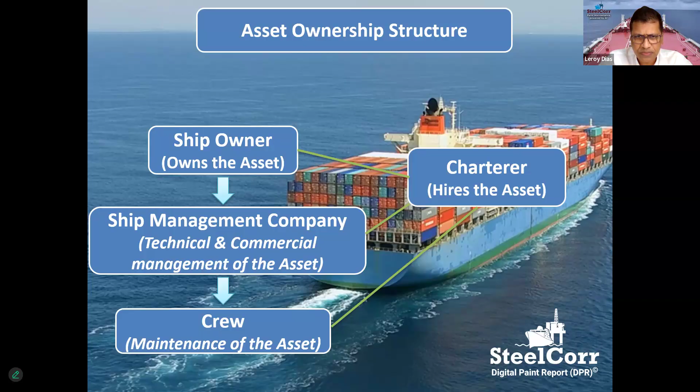The rental rates for the ship per day can range between $5,000 to $100,000 per day. That's what the charterer pays the ship owner in order to hire that ship and move the cargo. The reason I'm highlighting this is because it highlights how relevant it is for that asset to remain available, not have breakdowns, not be detained, and be fit for purpose as much as possible, so the ship owner can make money and get a return on the investment.

Another relevant figure is the cost of replacing steel. It costs between $4,000 and $10,000 to replace a ton of steel on a ship, depending on where that ton of steel is on the asset. In contrast, it costs only up to $500 to maintain that same ton of steel with paint for over 5 years. So it's a no-brainer that it makes sense to maintain steel with paint and proper corrosion management techniques to ensure it doesn't get to the point where it needs replacing.

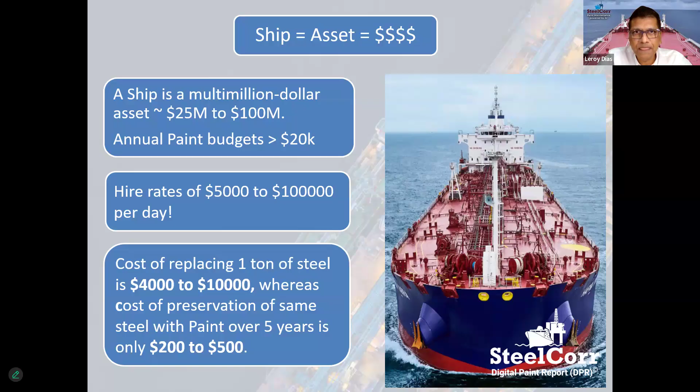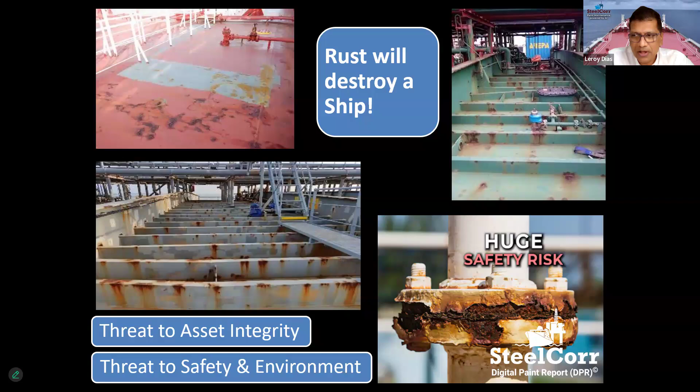This slide is self-explanatory; I don't need to explain that rust will indeed destroy a ship. It's a threat not just to asset integrity, but to safety and the environment. Why? Because if a valve or flange joint leaks and you got crude oil or chemicals leaking onto the deck of a ship sailing in the water, that crude oil or chemical is going to go straight into the seawater and contaminate it. Apart from the reputation damage this causes, the financial damage or fines are so huge they can set back the company quite a bit. So it pays to make sure your ship doesn't get to a point of deterioration where this kicks in.

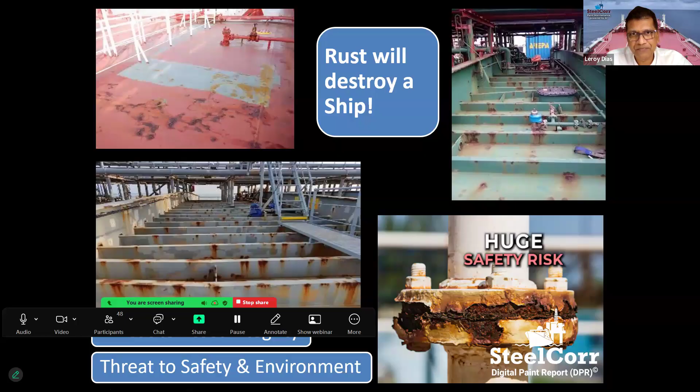The other relevant factors are the several regulatory inspections on a ship, either by the charterer, who will hire a surveyor to vet the ship each time it has to carry cargo, or port state and flag state inspections to make sure your ship conforms to the latest standards it's supposed to abide by.

If you look at the top right where you've got the cargo tank, clearly if a surveyor or charterer comes and inspects that cargo tank, he's not going to accept it for carrying vegetable oil for food grade consumption, or to carry a high purity chemical, because that will contaminate the cargo. So it will get rejected by the charterer, which means you're not making your daily hire rate.

The vessel is off hire until you can fix this. You can imagine the financial damage of between $5 to $100,000 per day.

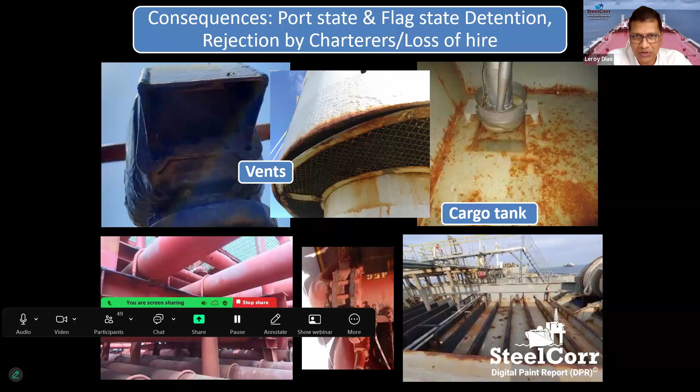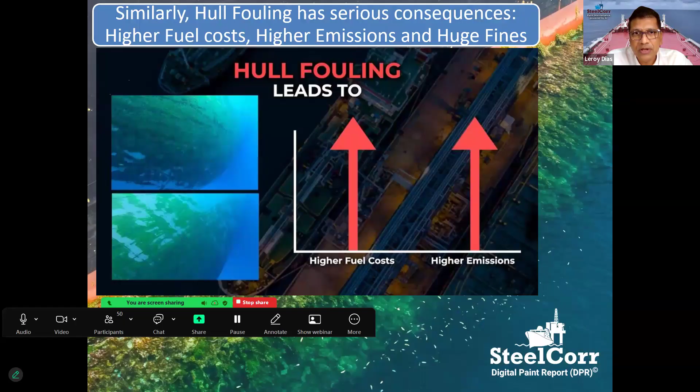Now, we're not going to talk about hull fouling, but I just thought I'll mention it here because it's extremely relevant for a ship. Hull fouling has serious consequences because it leads to higher fuel costs. What you see in the background of this image is a ship that is fouled with grass and shells. It leads to higher fuel cost, higher emissions, and obviously in some cases, a huge fine for transporting invasive species from one country to another in the water.

Now, there are different approaches for corrosion management when it comes to a land-based asset as opposed to a sea-based or an ocean-going asset, because the parameters are different. The metrics of evaluation are different, which we'll go into.

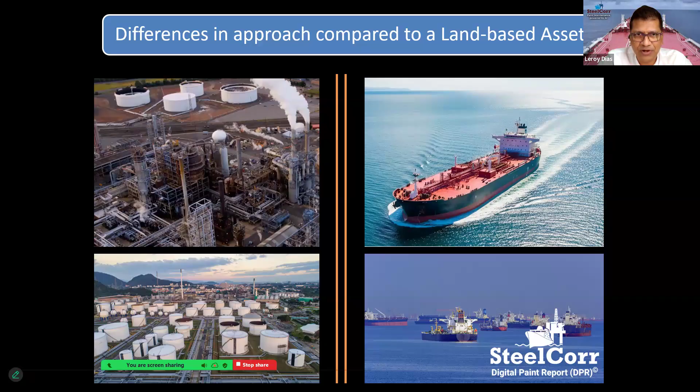What are the challenges on a ship? As you can see, there are several challenges. I've listed some of them, but I'll highlight a couple. One is your ship is not accessible for inspections like a land-based asset. You cannot get an inspector at your will, put him on a ship and let him conduct the inspections because, like I said previously, the ships are at sea most of the time. When they do come to port, they're busy with cargo operations of loading and unloading. The ship is not available for an inspection. So there's limited opportunity or limited windows for ship inspections.

The other aspect is for the crew, there's limited connectivity on board in terms of internet and Wi-Fi. You do not have unlimited access to internet connections.

The third part is the frequent crew changes. The crew on a ship changes every 3 months, which means there's limited ownership for the asset. So once the crew changes and goes to a different ship, they may or may not come back to the same ship again. So there's no ownership of the asset with the seafarer, with the crew. That's why it's important to have a mechanism in place that will, by default, give you a continuous monitoring system, regardless of who the crew is and regardless of how frequent the crew changes on the ship, right?

So we felt a more holistic approach was needed. And it's not just a matter of making inspection reports, but we needed to create a holistic approach and a holistic solution in order to deal with the challenges that are faced on a ship. That's where the SteelCorr Digital Paint Report app kicks in.

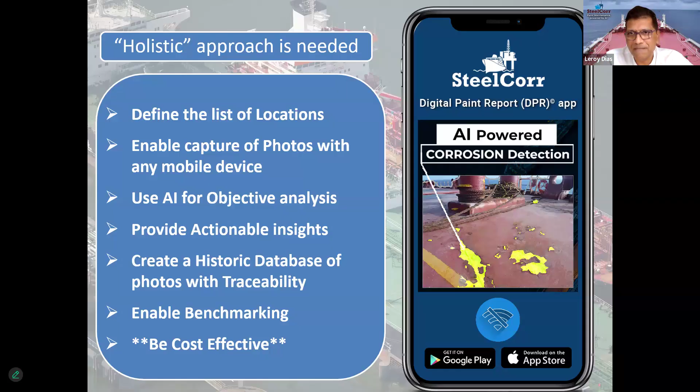In the case of the app, he simply clicks the pictures. It takes him about an hour and a half to click 150 pictures, because they are predefined, point and shoot, click the pictures, hit upload, job done. That's how simplistic it is to use the app.

There's one app for all areas of the ship. Whether it's your deck, your tanks, your superstructure, your underwater, or whether you're making daily reports, you use the same app for all areas of the ship. That's how simple it is.

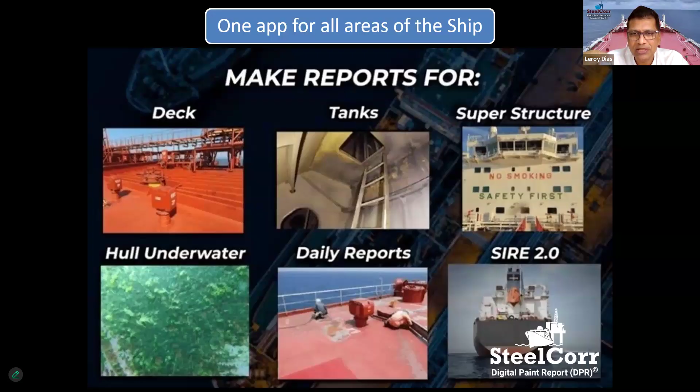Now, what do we do when the photographs come to the server? We use AI to process these hundreds of photographs, because each report can have 300 or 400 photographs. Rather than have a human being go through these individual photographs and make sense of them, we use AI to quickly process them and objectively assess the corrosion level in each photograph. So AI looks at each individual photograph, assesses the level of corrosion and fouling if it's underwater, and gives you a metric of corrosion and repair area in each photograph.

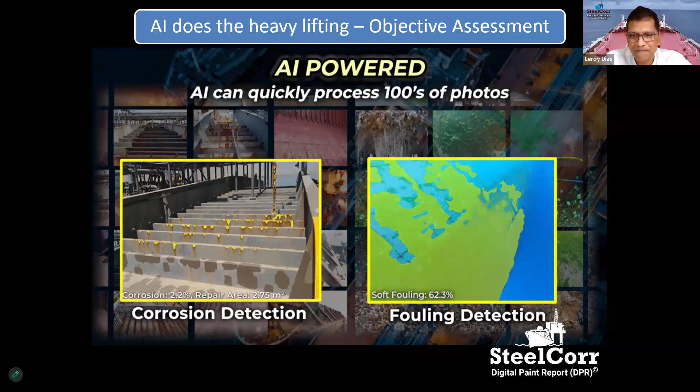Just to show you a few examples, on the left is the photograph that was uploaded by the crew. On the right is what the AI has done to it, highlighting all the yellow spots, which is where the corrosion is on this particular image.

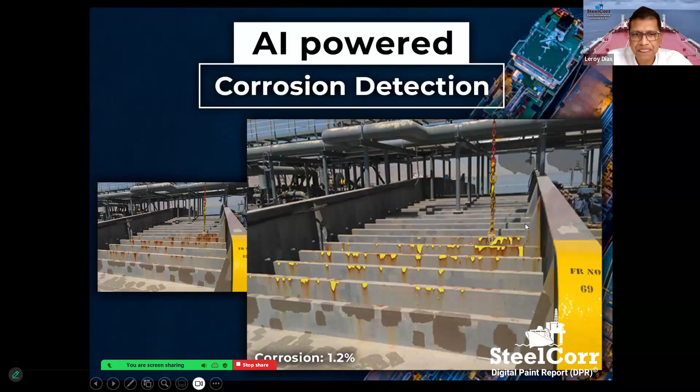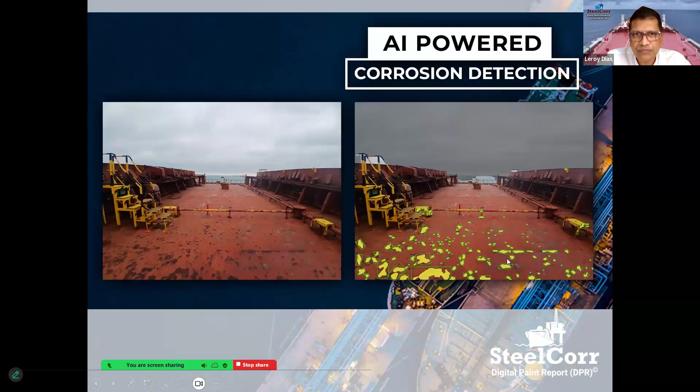Similarly, it's done here, so every photograph that is uploaded by the crew is analyzed. This is a cross deck between two cargo holds on a bulk carrier, same way. This is the cargo tank, a suction bell mouth area of a cargo tank, and as you can see, all corrosion spots are identified and marked up.

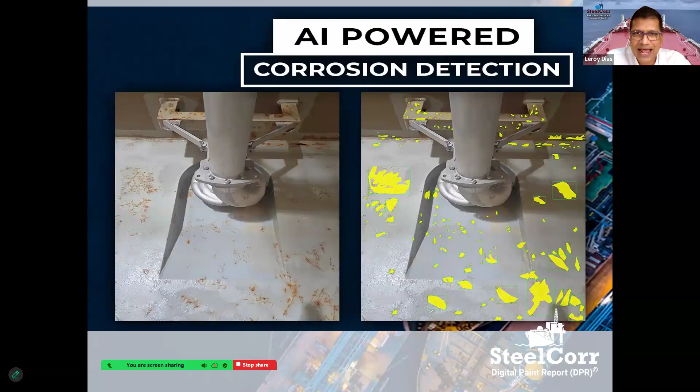So you know what the corrosion level is, and you also know what the repair area is, as calculated by the app. What we then do at the back end is stitch all this information together and give the user a dashboard with all the relevant information.

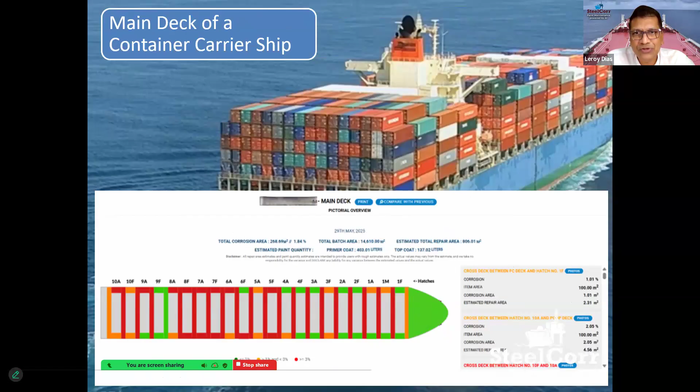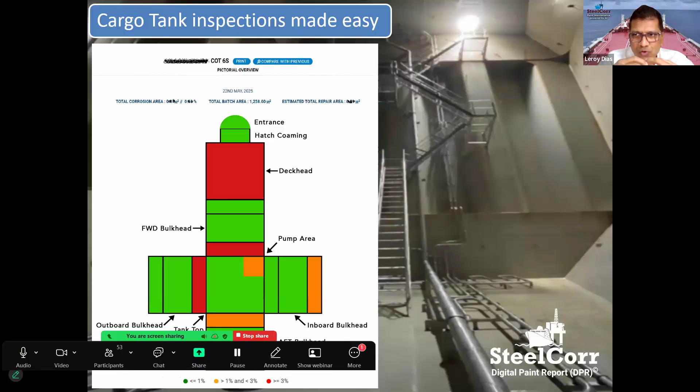Again, because it's a continuous monitoring system, you'll keep seeing that information change as you go along. You do the same thing for cargo tanks, seeing a pictorial overview based on the photographs uploaded for different sections of the cargo tank. Remember, all these locations are predefined on the app, so the crew can simply go and put the photographs of these locations. We do the same thing for ballast tanks, depending on what kind of format you've got for ballast tanks.

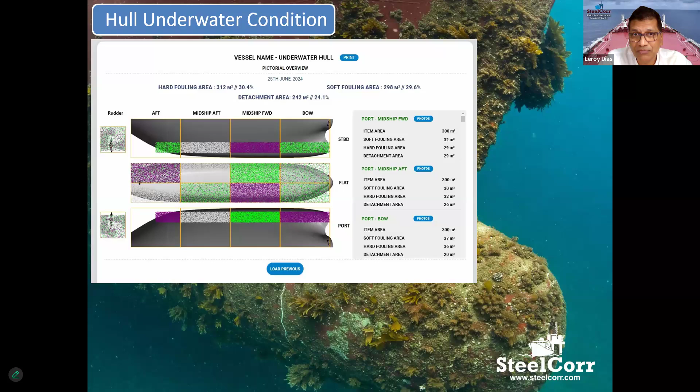Again, the app is customizable. We do the same thing for the underwater area, wherein we detect soft fouling, hard fouling, and detachment. So you also get an understanding of what the underwater area of your ship looks like, which is very relevant in terms of your fuel consumption and emissions.

We made our app compatible with drones, which means if you're sending drones through your tank, or sending a drone underwater to capture images, you can use the same app, simply connect it through a cable, and use it to conduct drone inspections on your ships as well.

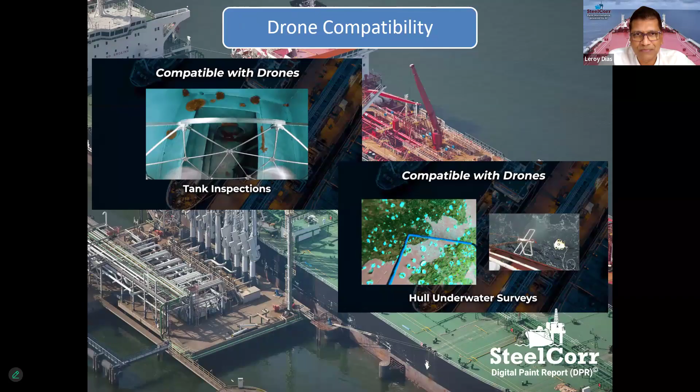All the information generated on the app, apart from being on the dashboard, is sent to stakeholders via email. So you're not looking for this information - it comes to you straight via email in your inbox.

Apart from the corrosion, you can also manage your paint consumption on the ship. So you get a quick overview of what your paint consumption on the ship is versus what the corrosion level on your ship is. That gives you an understanding of how your paint is being put to use on the ship.

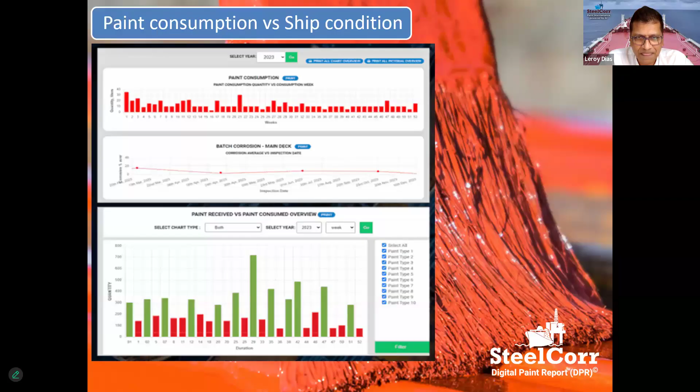We allow you to trace the photograph, so you can go at any point, click on the dates and the location, and see what a particular location looked like previously, how it has changed over time. You can do this at a click of a button.

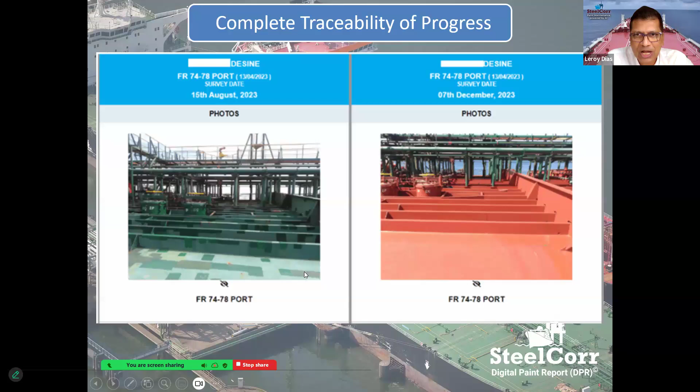You can also benchmark your assets across different ships. So you can go and look at, for example, the forecastle deck on 3 different ships or 10 different ships and see how it looks on different ships, understand whether the maintenance on one ship is different from the other, and use that for benchmarking your fleet as well.

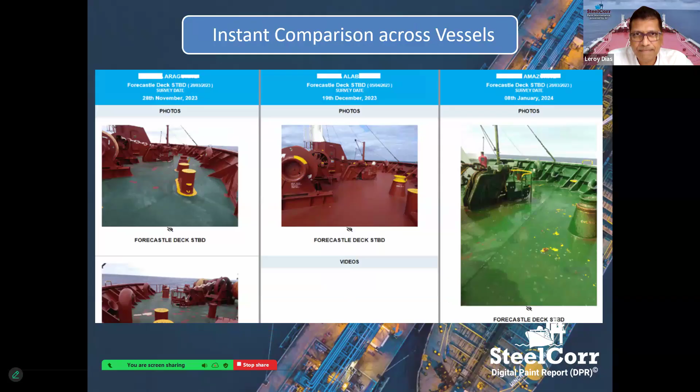The crew, of course, can show off the good work that they're doing by making daily reports.

We are particularly pleased by the feedback that we get from the crew, because that for us is the link that helps us - you've got to remember that the crew we use for capture of the photographs are not paint inspectors, they're not corrosion engineers.

But the way we simplify the process is that we load up the app with all the locations. We make it simple for the crew - it's point and shoot literally. So they point to the location on the app, take a picture, and upload that.

It takes them 1/10 of the time it would normally take to make a report, which is why the feedback from all our crew is that they love it, because it saves them time. It's easier to upload - they don't have the headache of taking photographs, resizing them, downloading them, putting them in Word or Excel formats, and emailing them. Everything is done by the app.

When it comes to your cybersecurity and data privacy, that's taken care of because we securely host your data on the cloud. The access to the data is controlled - only the subscriber decides who gets access to the data and for how long.

We've spoken a lot, and in order to summarize this before I end, I just got a 2-minute video that I would like to play that would bring all this together and summarize the entire app in under 2 minutes. So I'm just going to play that video for you now.

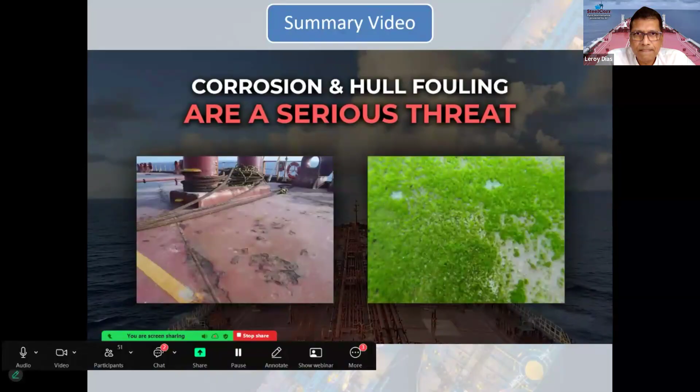Can AI help vessel managers save time, money, and support their ESG goals? Corrosion and hull fouling are a serious threat to your multi-million-dollar assets. Poor fabric maintenance can lead to port state and flag state detentions, rejection by charterers, a bad reputation, and is also a huge safety risk. Hull underwater fouling leads to higher fuel costs, higher emissions, and often draws big fines. So, how can technology help?

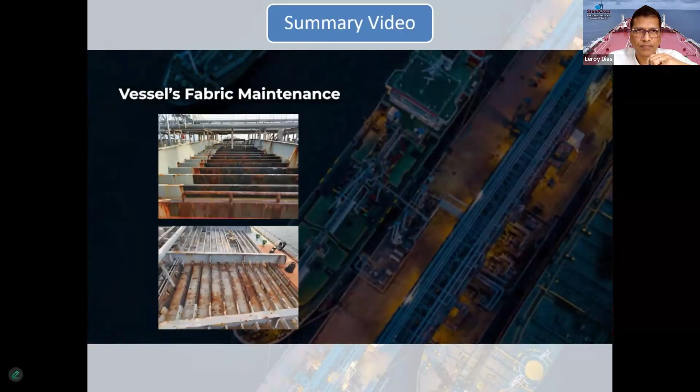The AI-powered SteelCorr Digital Paint Report app is a comprehensive solution that supports a vessel's fabric maintenance and hull fouling monitoring program. Your team simply uploads photos, our app does the rest. All deck, tanks, superstructure, hull underwater, daily reports, and SIRE 2.0 photo reports can now be done using a basic mobile phone.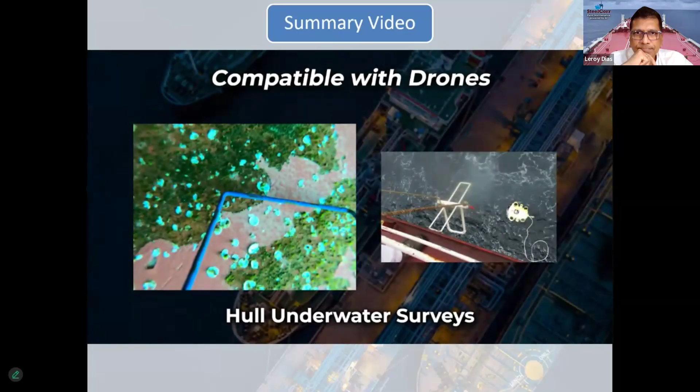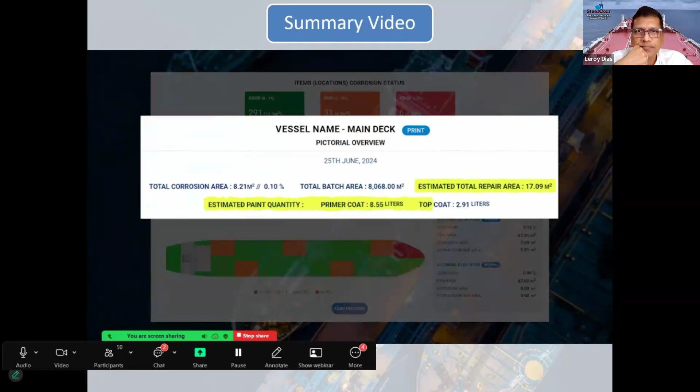The app is also compatible with drones for tank inspections or hull underwater surveys. AI is used to process hundreds of photographs and establish the corrosion trend and fouling pattern on an asset. The pictorial dashboard highlights critical areas and provides relevant information, such as repair area, paint quantity estimates, and hull fouling patterns, thus enabling timely maintenance.

Stakeholders are notified via emails. Onboard paint inventory management can be done via the same app. The app is mobile-centric, and reports can be made without an internet connection.

The app also saves time spent by the crew in making reports. No more transferring photos to the computer, resizing, formatting, or emailing is needed. The app does it all. That's why the crew love our app.

And rest assured, your data is securely hosted on the cloud. Only you decide who gets access to the data. Interested? Check out steelcorr.com.